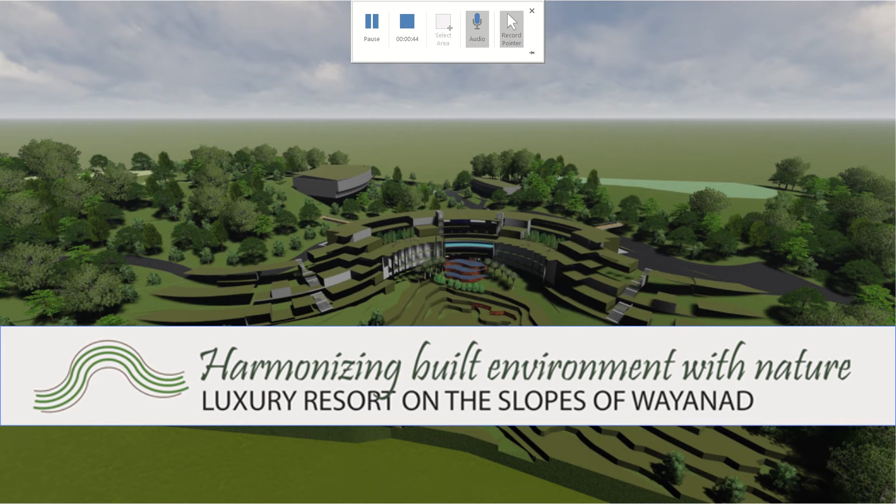I am Dona Grace Joseph, and the topic for my thesis is Harmonizing Built Environment with Nature, a Luxury Resort on the Slopes of Wayanad.

The aim of the project is to harmonize built spaces with nature through the design of a luxury resort on a sloping terrain. The objectives are to analyze the site, study the topography and climate conditions, to understand different phases of a resort and their interdependencies with each other and interaction with nature, make analytical study of the functional requirements of the resort, and implement efficient design to carry out the function smoothly.

To create spaces that can address the needs related to leisure and tourism, to create interesting outdoor spaces and their connection with the main buildings, and to create an interactive ground for locals and visitors so that there may be interchange of ideas and cultural demonstration.

The methodology is starting with data collection, case studies, site study, analysis, concept and zoning, design development, and leading to the final design.

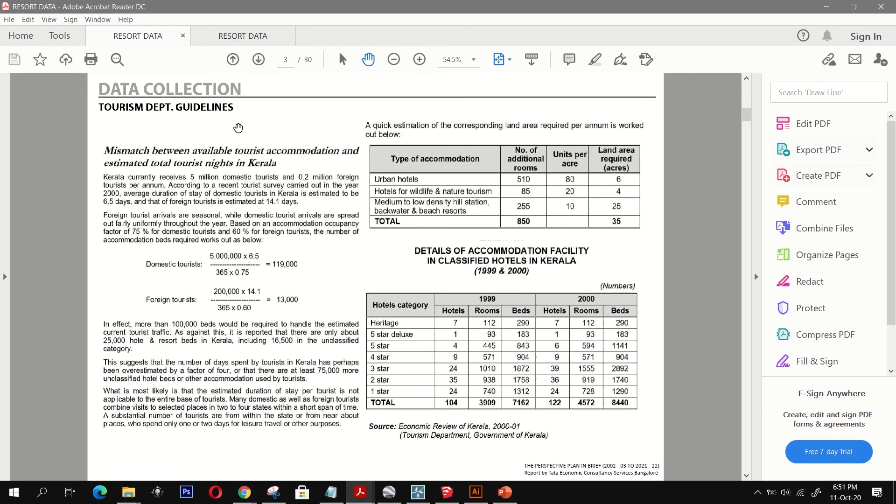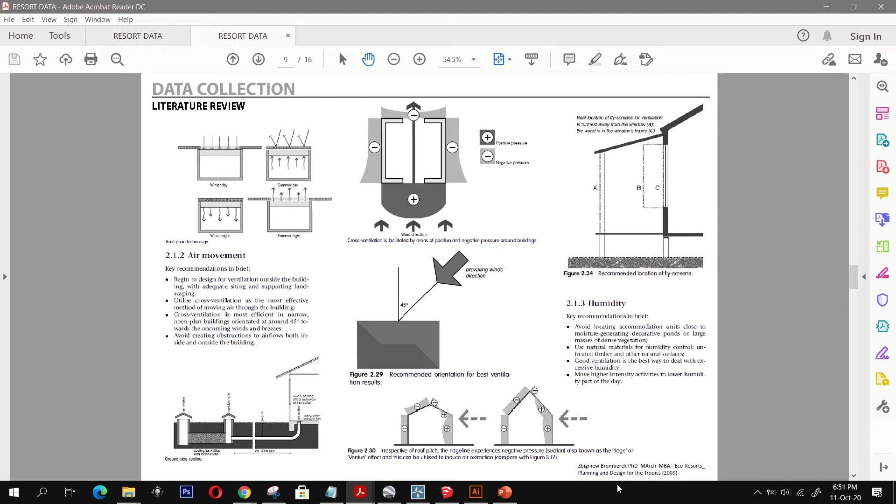For data collection, I have collected data from Tourism Department guidelines, HRACC guidelines, Hotel and Resort guidelines, Neufert Standards, KMBR, and a book called Eco Resorts Planning and Design for the Tropics.

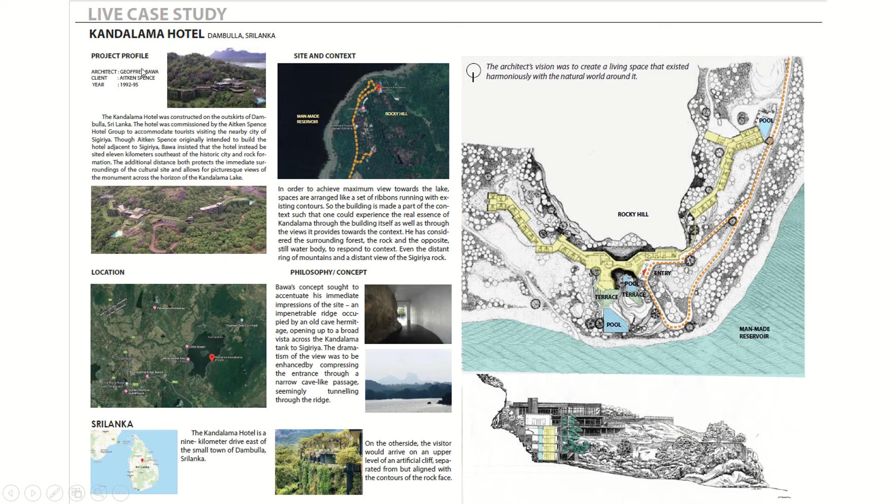For case studies, I have taken Kandalama Hotel, Sri Lanka by architect Geoffrey Bawa, and Kovalam Beach Resort by Charles Correa in Kovalam, Trivandrum.

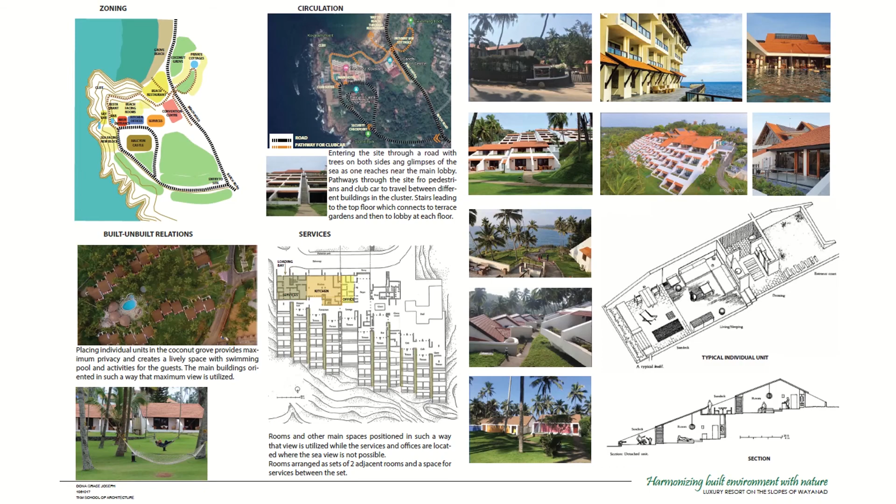The site I have selected is in Wayanad, and Wayanad is famous for its winding roads and hills, and it is also a developing tourist destination. The number of tourists visiting Wayanad is increasing day by day, so there is a scope for tourist-friendly, tourist-attracting projects in Wayanad, which is why I have proposed my resort there.

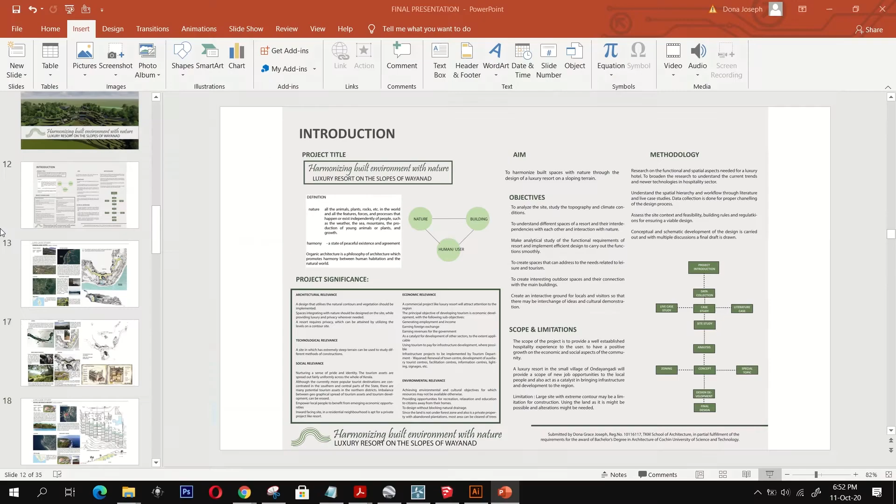The site is located in a small village called Ondayangadi, which is 6 kilometers from Mananthavady in Wayanad. This is my site.

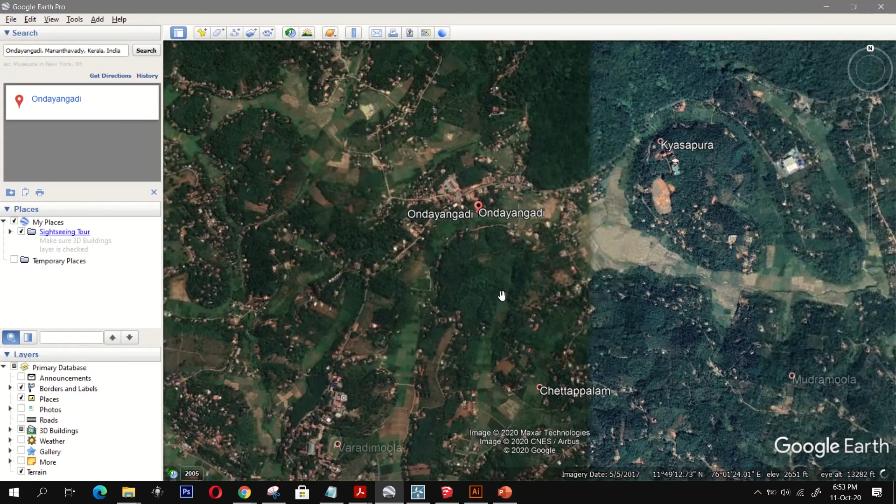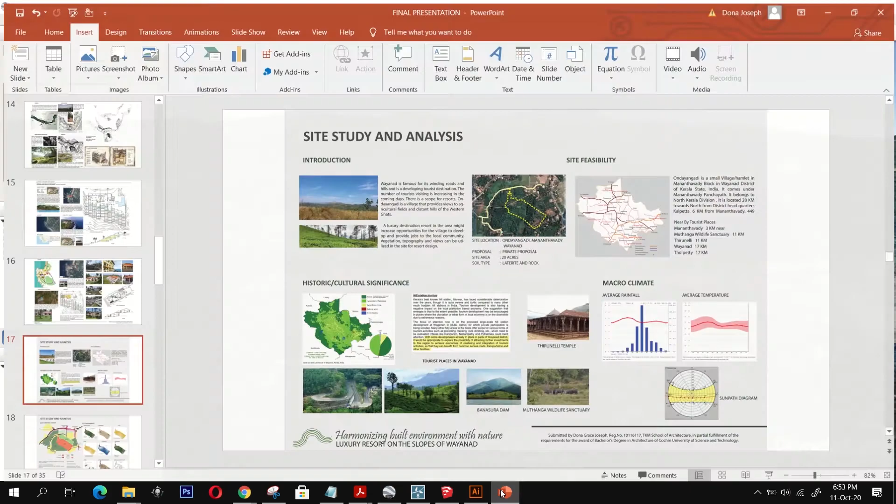The site comprises of 2 hills and a valley, and it has the highest point in this area, and from here we can get distant views of the Western Ghats standing on the site. The site area is approximately 20 acres, and the soil type is laterite and rocky. The site comes in this region of Wayanad, so it comes in the plantation area and not under the forest area.

The site is located in a residential context, away from the main road. It is an inner region, which is accurate for a resort because of its privacy, and it is surrounded by thick vegetation.

This is the highest point, and this is the second high hill, and there's a valley in between these both hills in section. From the topmost hill, we can see the Western Ghats.

There was an existing road, and an existing shed, and a water collection point in the valley. These are the existing trees.

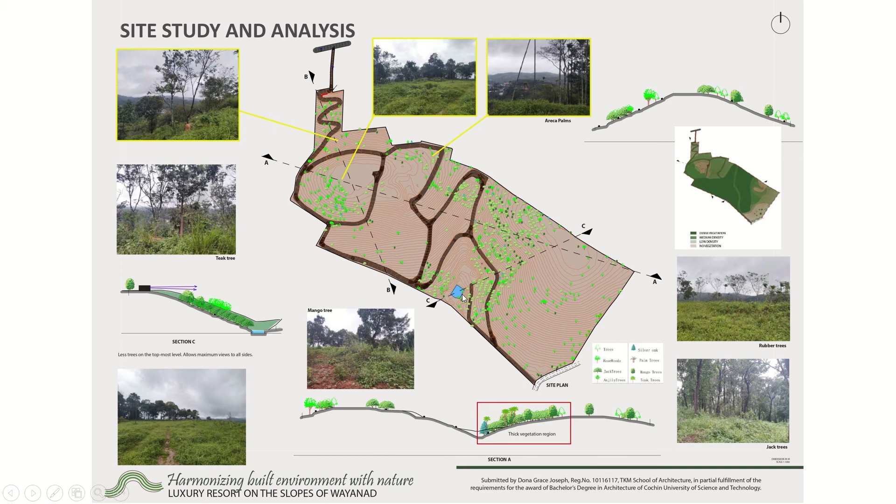The major strength of the site is that since the site has contours and slopes, it can be utilized for designing with maximum vantage points. And since the site is away from the busy town, it is very peaceful.

The main weakness of the site is that due to its extreme slope, most of the region may be difficult to build, to construct, and to bring the materials for construction. Also, it is very difficult to reach the site.

Opportunity: a resort in the site can increase the potential of the locality and help in the development of the village, and also provide job opportunities for the local people, and can allow a platform to showcase their culture and talents.

A major threat to the site is that it is located in Wayanad, and since it's a very heavily contoured terrain, landslides might be a threat for it. Also, due to more tourism programs, there might be a cause of damage for the ecosystem, and vegetation might be a threat.

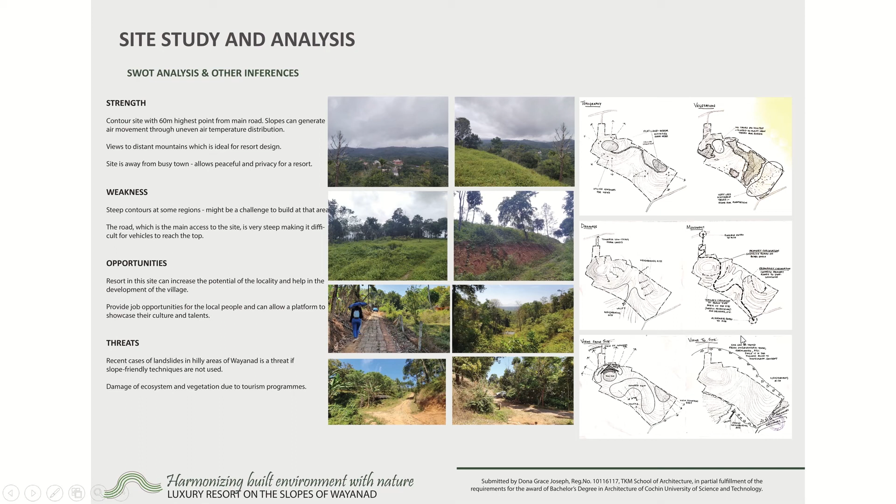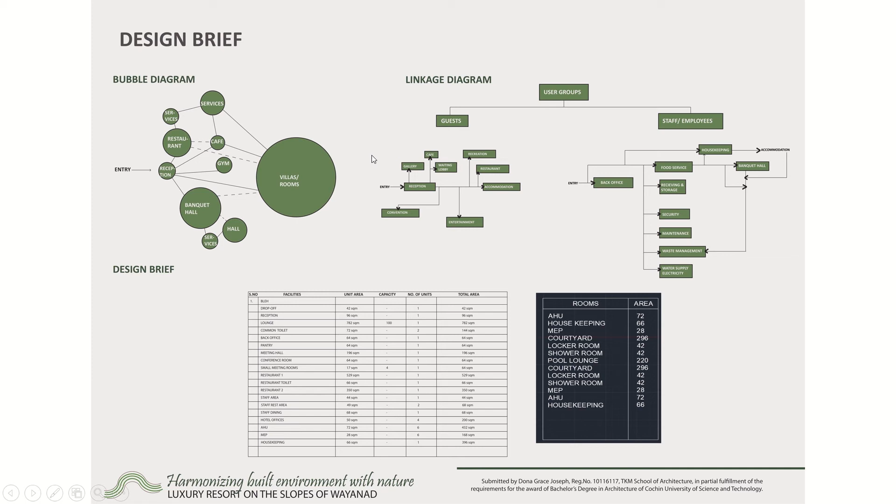For a resort, the major two user groups are guests and staff or employees. So there need to be these requirements for both the users.

Concept: since the major concept is to harmonize built environment with nature, these aspects need to be brought together, that is integration with nature, local culture depiction, construction with minimal intervention, experiential quality, and coexistence with community. All these aspects need to be brought together.

And in the zoning itself, I have brought that this entire site gives an overview of the major attractions of Wayanad. That is, the entry itself reminds us of the winding roads of Wayanad, and there are tea plantations. I have given tea plantation on this side, and rice paddies, so it gives an overview of Wayanad itself.

For the zone, the major massing or form of the resort is based on the site itself, the site shape. So first, majorly, the two hills have been bridged with a curved block which faces towards the valley, and I have given step floors for it, so maximum use can be utilized. The extension to that block has been taken in the shape of the contour lines itself.

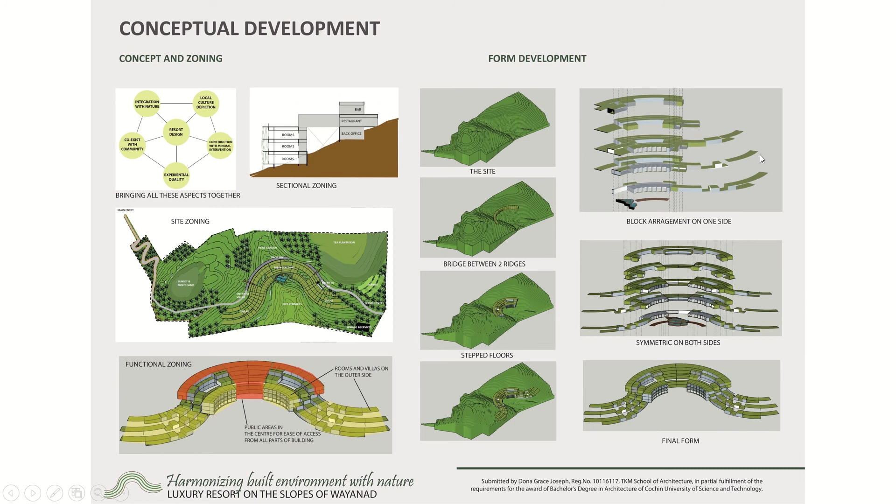This is on one side the major building block and the wing block, villa wing block. This is the final form.

So the major justification for positioning the main building here is because mostly in a hill, the mid-section of the slope is called a warm belt, and it is warmer at night than the top and the foot. It can increase the aesthetic qualities, and the views can be utilized easily if we place it on the mid-slope. In tropical regions, the sun's position is usually perpendicular to the hill slope.

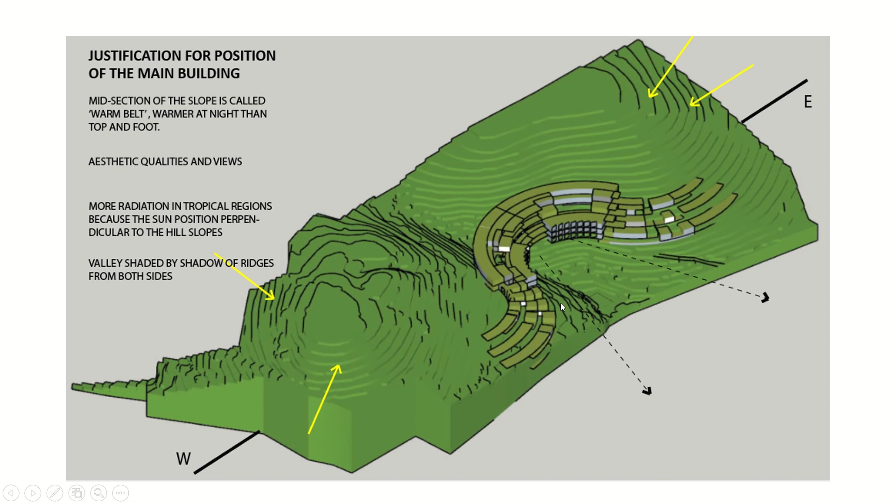So on the west and east, there is more radiation hitting. So with the position I've given now, it is more secure from the direct sun radiation, and also this valley is shaded by these two hills.

As we come to the master plan, from the main road, the existing entry has been maintained. On this side also, this entry is maintained. Existing road has also been maintained from till here, and then once we reach the security cabin, from there we get directed to the main road, which leads us to the main building, and the road follows the shape of the building.

As we reach the center of the building, that is where the entrance is, and the kitchen block has been placed here so that it is opposite to the restaurant on the main building. It is near the restaurant, so it can easily cater to the services there.

This is the secondary entry or the service entry. From here, this is the main service area, STP and water harvesting and all. The spa and the banquet hall has been given near to the main building's entrance, so that it can be utilized easily.

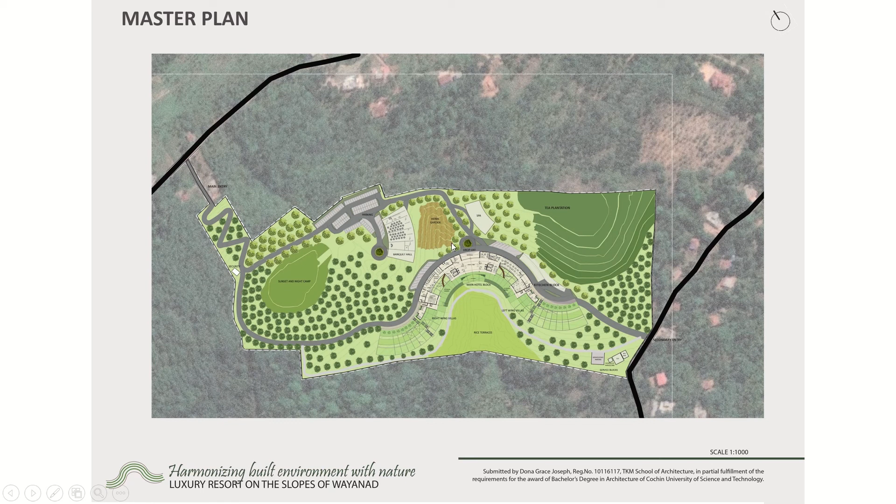The area in the center of all these three buildings I have given as a herb garden, which can be utilized by people from all these three buildings. And the parking is near the banquet hall, main parking. There's also immediate parking near the main building entrance.

I have given walkways for the guests to explore through these trees and reach a main pathway which connects to the sunset and night camp. Since this is the west side, there's a view deck which can be used for sunset view. And on this side, the east side, there's a yoga pavilion which faces the east, so it can be used for sunrise view.

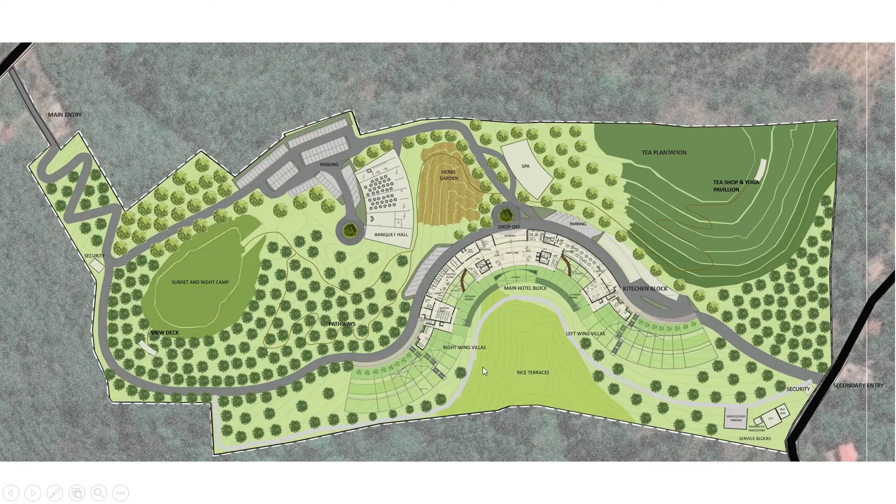Pathways leading to the tea plantation have been provided here. Through the herb garden, all these pathways are connected, and from here there is a connection through the stairs to the rice field as well. From these steps we can reach the lower land.

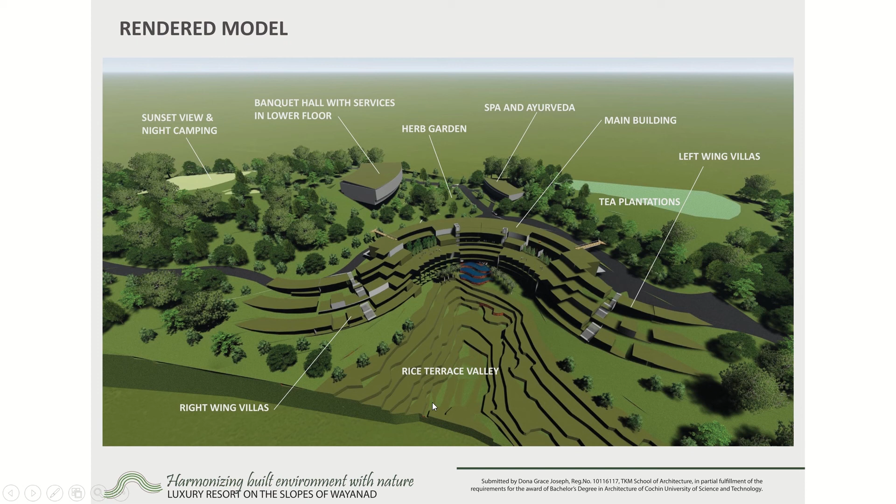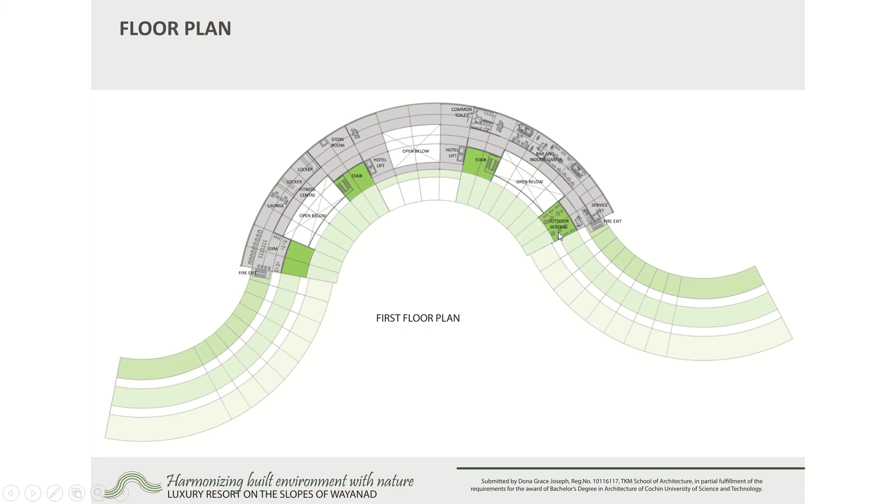Once we reach the first floor, from the left, on the left side is the fitness center, and on the right side is the bar and indoor games, with fire escapes on the ends. The gym also has open space, and the bar also has open space to the roof of the lower floor.

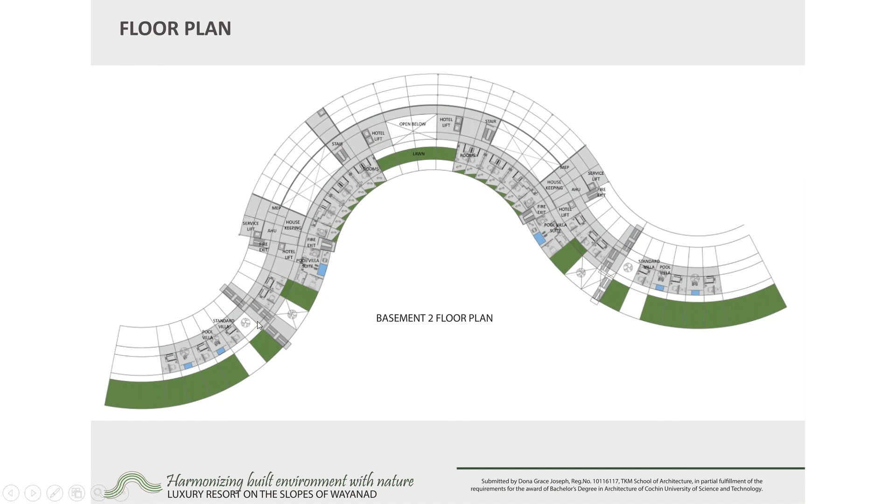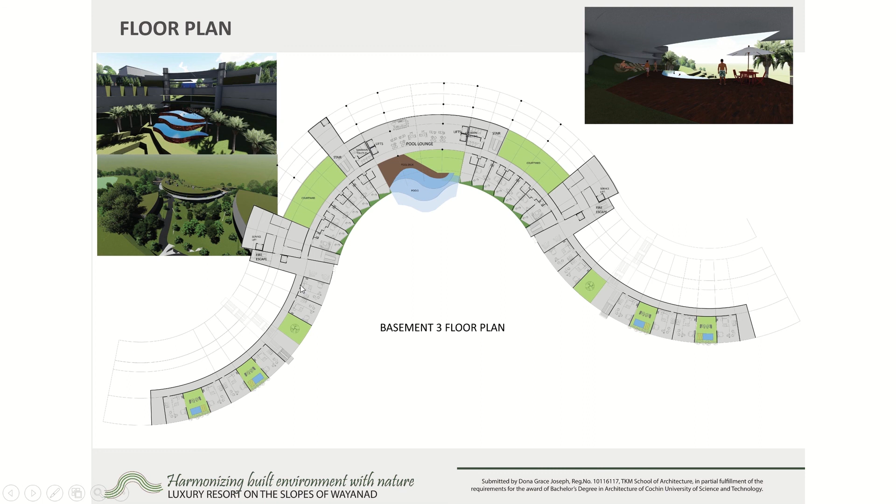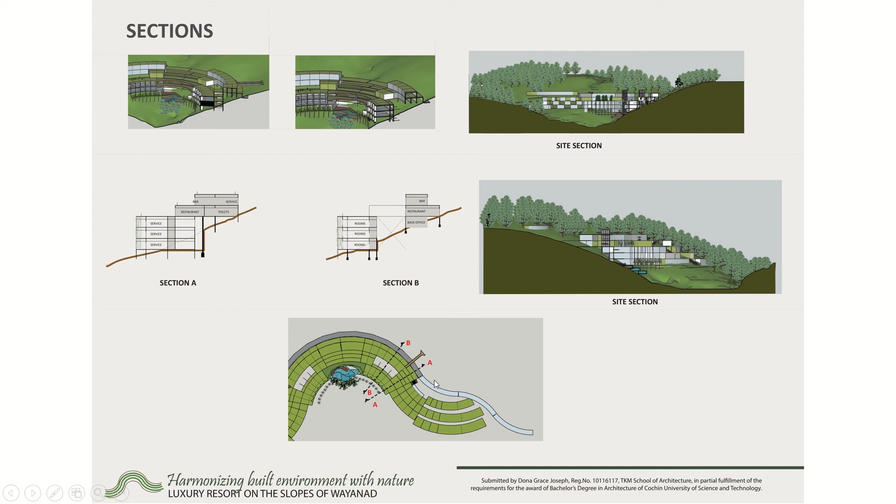This is a section of the villas, with covered corridors. Covered corridors continue till here, and from here we have an open roof corridor. And this is the part where the building merges with the land, with a green roof.